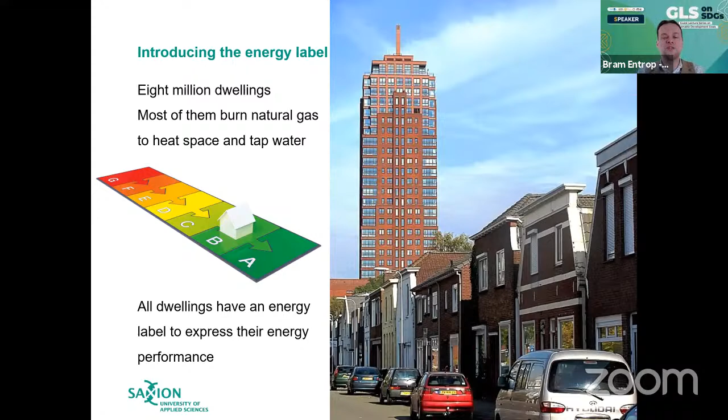So a great transition needs to take place. We introduced, therefore, and also as the European Union expects from us, an energy label system for our existing houses, while there was already a regulation system in place for new houses since 1995. But only in 2008 did we officially adopt the energy label system for existing houses. A is the best performance, and G, as you can see by its colors, is the worst performance to expect.

What kinds of techniques are now commonly adopted? Well, we can see a high adoption rate regarding photovoltaic panels, systems that produce electric energy for households and can be earned back within approximately 5 to 7 years. Most consumers think that's quite a nice time to earn your investment back.

So photovoltaic systems are quite quickly adopted, and it's quite hard now to obtain them because all these companies are quite busy with installing them.

In new houses, heat pumps are also quite commonly used now because you're not allowed anymore to use natural gas. So the first thing that comes to mind for people are heat pumps, making use of thermal energy coming from the earth, or thermal energy coming from outdoor air.

LED lighting techniques are also commonly adopted. It's a no-brainer anymore, so everybody will now install LED lighting. And more often you see heat pipes being installed, or more conventional thermal solar collectors. So those are the techniques increasingly being adopted in new buildings.

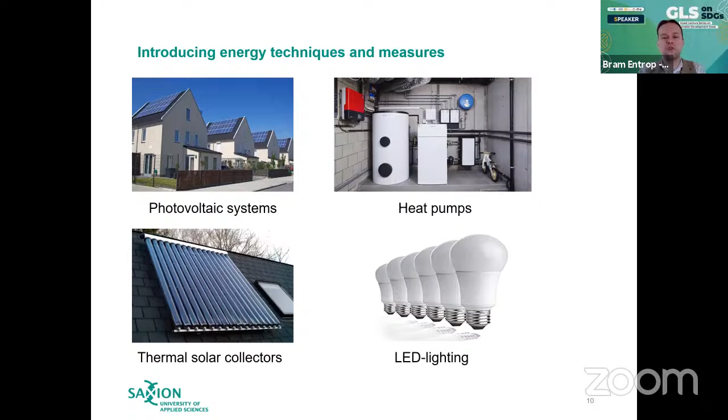For the existing building stock, we still have quite a challenge. So we wondered in our research setup how to develop a framework to assess the implementation potential of energy techniques and measures on the basis of their effects on and for stakeholders in residential building projects. We have more or less 3 areas we were looking at, namely the energy performance, the financial impact, and the decision-making process in building projects.

And somewhere in the middle, where everything aligns with each other, where everything is positive - a perfect situation - there these energy techniques will be properly implemented. So we were looking for that particular spot, where to find it.

Well, and then you first need to know something about how these energy labels are attached to those houses. For new buildings, we had an energy performance coefficient up to the 31st of December last year. In the past, already more than a decade ago, we had an energy index based on the energy performance advice. An inspector would come to your house, have a look, assess all kinds of lengths and the type of insulation, the types of systems you have installed, and decide for you what the energy index is for your building.

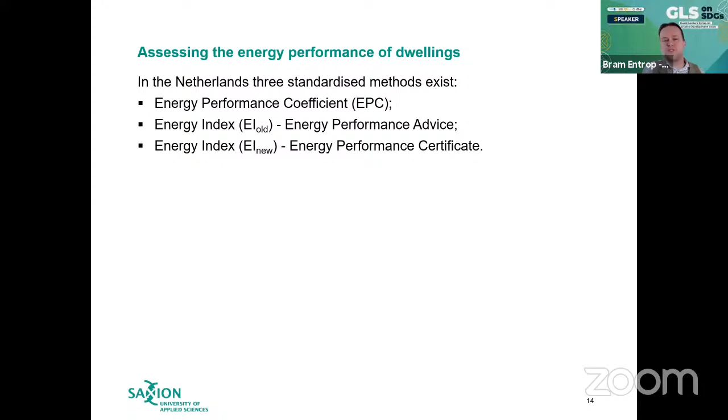And later on, almost based on the same principles but with a new calculation technique, we had the official, EU-obligated Energy Performance Certificate. So the Energy Performance Certificate more or less replaced the much older Energy Performance Advice, but not with all the improvements that were necessary, to be honest, but we will see what happens next.

So we also conducted a study on 8 houses from different years, and you see all kinds of strange elements in these calculation methodologies. One might expect that if you conduct a calculation resulting in an energy performance coefficient or an energy index, it would also more or less reflect the actual energy use of the building. However, that is not the case at all.

Everything strongly depends on how you use your building. Who are the residents? What is their age? What is their day-to-day rhythm? That will have a huge impact on what the actual energy use is.

These 3 methodologies all try to reflect an energy use that one might expect with standardized usage of the building, considering its building-related elements. So the energy use of your refrigerator or computer is, for example, not incorporated here. That you leave your television on all day is not regarded in these types of methodologies either. They also expect that you have a standardized temperature all year through in your living room and bedroom, etc.

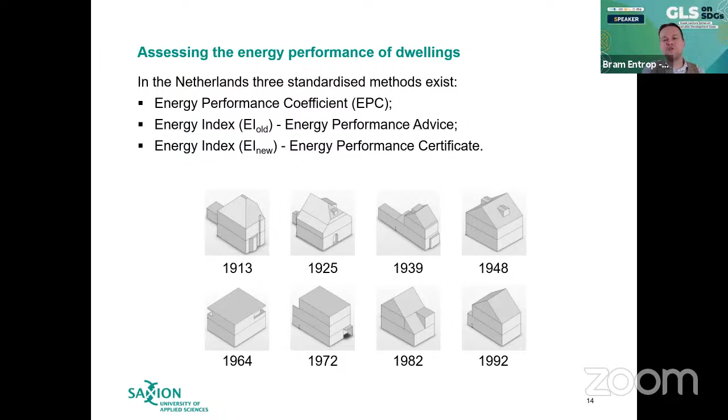So the relation we are still looking for is between actual energy use and the theoretical planned energy use based on the design of the building. We have 3 methods in place, however, all have the same basic equation.

On the upper side of the equation, one can find an assessed energy use based on the design of the building and its planned installed systems. And in the lower part of this equation, there is an allowable energy use.

So when your house has a certain floor surface and surface of the thermal shell, depending on the particular size of that, it's allowed that your energy use is slightly higher when your house is bigger and slightly lower when your house is smaller.

And you need to take all kinds of measures, for example improved insulation or a better heating system to be installed. You need to install some photovoltaic panels to make sure that this upper part of the equation is low enough. So in the end, this value - the energy index or the energy performance coefficient, since the setup of these equations are all the same - is as low as possible.

For your idea, we started in 1995 for the energy performance coefficient with a value of 1.4, and last year it needed to be 0.4. So gradually the regulations improved in that regard.

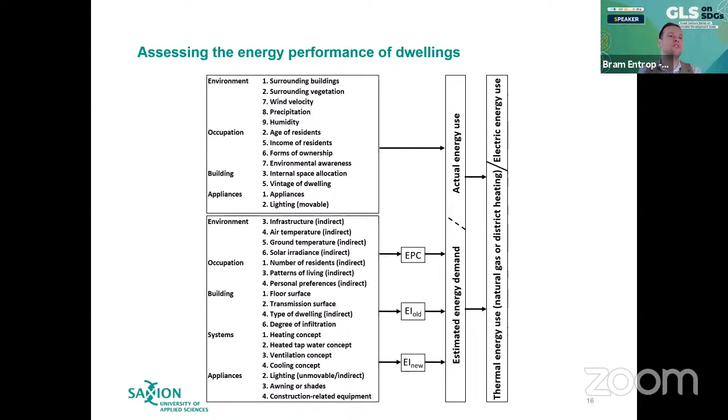However, by the 1st of January, we have a completely new methodology. We call it the nearly energy neutral buildings, in short, in Dutch, BENG. It's a BENG building, but it now has 3 indicators. So we scaled up from 1 indicator per building to 3 indicators. Namely, you need to make sure that the maximum energy demand is not that high. You have a maximum primary fossil energy use that is not allowed to be exceeded. And there is a minimum percentage of renewable energy use sources that needs to be adopted. So we have now regulations per square meter that you're allowed to comply with.

That maximum energy demand changes slightly when your house is more or less compact. So they also gave thoughts about, well, if you construct a bigger house, you probably can also take more investments to make sure your building is more energy neutral than when you construct a smaller house, often associated with social housing, for example. So they also tweaked these kinds of values in this new methodology.

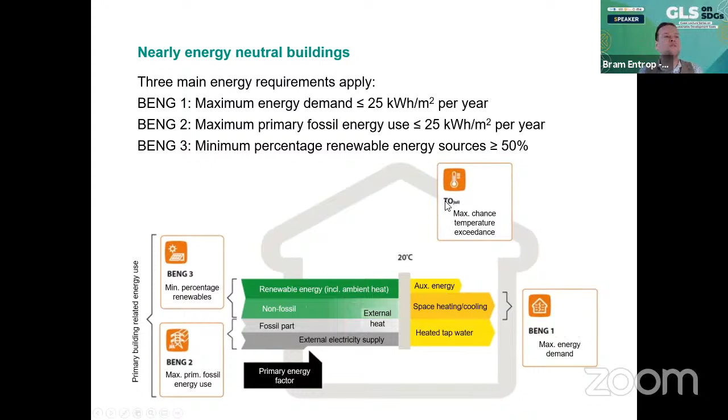So you need to apply shading. You need to apply, for example, that could be a technique to be adopted, a heat pump with a cooling facility taking place, etc. There are multiple ways to also comply with that regulation. So that's what we call the TOjuli.

Please warn me when I'm heading for my time schedule, of course, Sarah. Yes, you still have 15 minutes. That's around 10 minutes. Yeah.

Because we're heading to the financial elements in this regard. And when you do these kinds of investments, you always need to be aware that often you can buy certain techniques in a shop, but then they do not work properly yet. They are not installed in your house properly. You cannot use them directly. And many of these techniques already in the design stage of your building need to be taken into account. So it was also for us interesting to have a closer look at what's happening when we are aiming for these kinds of investments to improve the energy performance of your building.

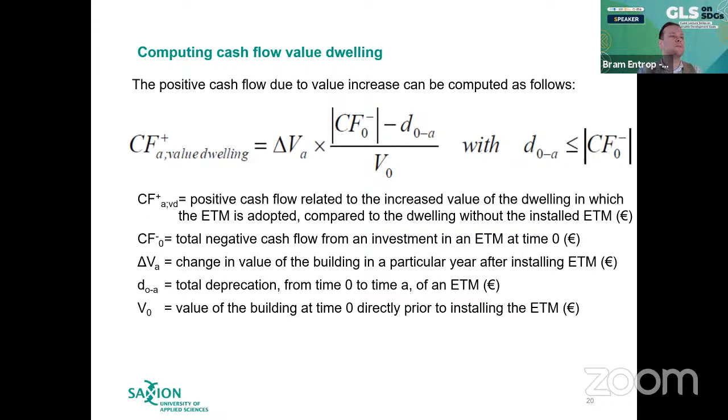What about these decision processes? We took a look at 4 residential building projects where decisions were taken regarding the energy performance of these buildings. Although there was a regulation to come to an energy performance coefficient of 1.0, in all situations they were aiming at a 10% improved energy performance, so 0.9 needed the score to be. And all kinds of discussions took place on how to come from that 1.0 to 0.9, and which extra investments needed to take place to make sure you can come to that 0.9.

In this research, it became quite clear that the regulations laid down in our national building code are not part of the debate anymore. As soon as the national government states you need to improve the energy performance, contractors and architects will look for the cheapest possible way to reach that new score in terms of investment costs, not return on profit over time for the future user, unfortunately. They won't debate that anymore. They'll improve insulation packages, start off with 2 or 3 photovoltaic panels on the roof, and then it's set until the next stage, the next regulatory improvement.

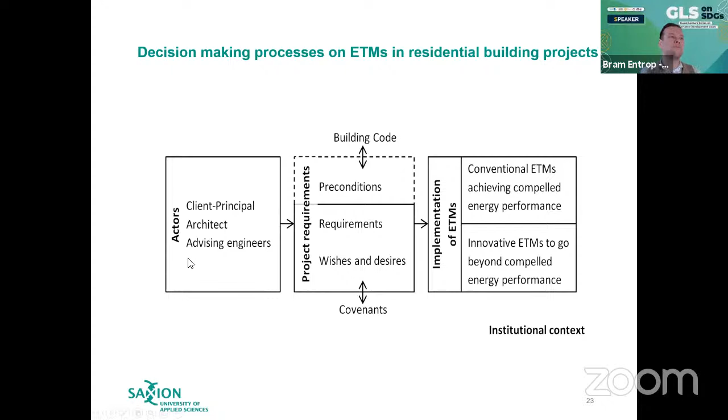What about these phase change materials then? Phase change materials have the ability to store thermal energy at a particular temperature - by that means it's a kind of battery, a battery for thermal energy. We apply these phase change materials in concrete floors. So during the day when people are at work, the solar irradiation entering a house will store some energy in the floor of the building. And when you come back later during the early evening, when environmental temperatures are dropping, these floors will start to give way the stored thermal energy.

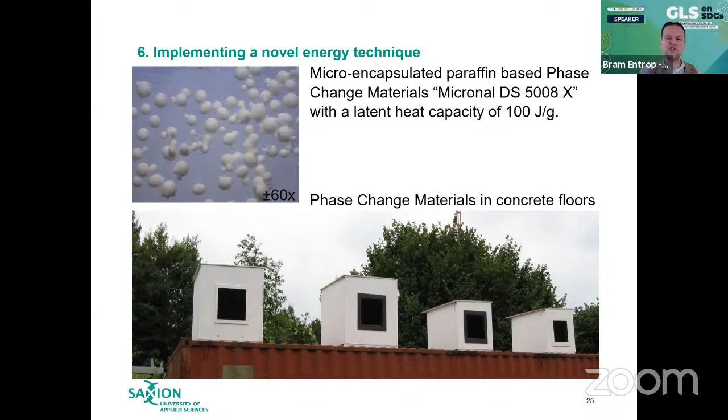So we conducted some experiments. We developed 4 boxes with and without these phase change materials and with different insulation packages, and we saw that these phase change materials - in this case paraffin-based - really had the ability to store solar thermal energy and give back their heat during the evening, during the summer day, and also partly from spring to autumn. During the winter, you need to be aware that you will not heat these phase change materials with fossil fuels. So the change temperature needed to be above 21 degrees, but not too much above this value, and therefore 23 degrees seemed like a proper temperature here in the Netherlands for our experiment.

What we saw is that if you have this technique available without any hard data or simulation software for an architect, then it's not likely that an architect, together with advisors in these kinds of design and construction processes, will adopt your technique. You need to have everything in place so that you can make clear in advance that this technique will do what it's supposed to do. Without that simulation software - and we also experienced this with another innovation, a double roof system that's been introduced for more than 10 years - you really need simulation software so that advisors can work with it.

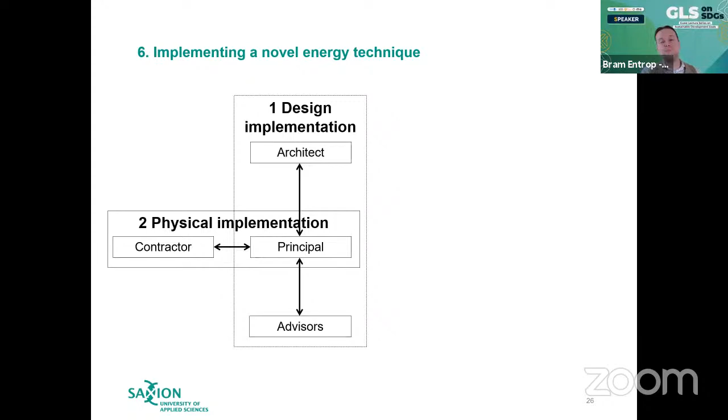And then you also need to persuade the contractor to apply these techniques. Furthermore, in some cases the owner of the building will not even be the user of the building. So you need to facilitate communication between all these different stakeholders and actors who have an important position in this whole design and construction process. We'd like to make you aware of that. A design implementation needs to take place, a physical implementation needs to be guided.

Marketing implementation needs to be taken, and user implementation when you are planning to introduce a new energy technique or measure. For all the entrepreneurs among you, and for all the researchers with their new techniques, please be aware that these kinds of marketing techniques really need to fall in place when you're planning to introduce a new technique to the market. At least that would be our suggestion.

So to sum up: the implementation potential of ETMs can be improved by these theoretical EPIs. However, be aware that in some cases there's a mislink with the actual energy use. So when you have a new energy technique, make sure the building code and the energy performance indicators that apply in that particular country are in line with the technique you want to introduce, and that you can also persuade the actual residential users through a reduced energy bill.

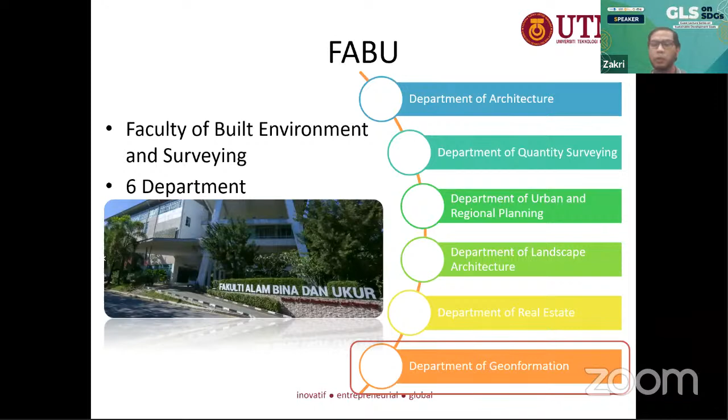Me and my team are in the Faculty of Built Environment and Surveying. Under this faculty we have 6 departments: Department of Architecture, Department of Quantity Surveying, Department of Urban and Regional Planning, Department of Landscape Architecture, Department of Real Estate, and Department of Geoinformation. I'm under the Department of Geoinformation, and this study is basically a combination or integration of my department and the Department of Real Estate.

This is our current bachelor degree programs. For undergraduate we have Bachelor of Geoinformatics, Bachelor of Science Geoinformatics, and Bachelor of Engineering Geoinformatics. For master's we have Master of Science, both coursework and research, and also Master of Philosophy. Under that, we have Master of Geoinformatics, Geomatics, and Remote Sensing. And for PhD, we have PhD in Geoinformatics, Geomatics, and Remote Sensing. So that's just a little background on UTM, FABU, and my department, Geoinformation.

Now we're going back to our main topic, what I'm going to share today. As I said previously, I'm going to share how we assess the surrounding area of affordable housing in terms of the social aspect only. We have another study on the environmental aspect and other aspects, but it's still not finished yet, so I cannot share that now - maybe a little bit later on.

Okay, my sharing today will cover a little bit on introduction, and then the problem that we faced previously. From there we come up with the aim and objective, and then the method that has been used inside the study, and then a little bit on the result, and lastly the conclusion.

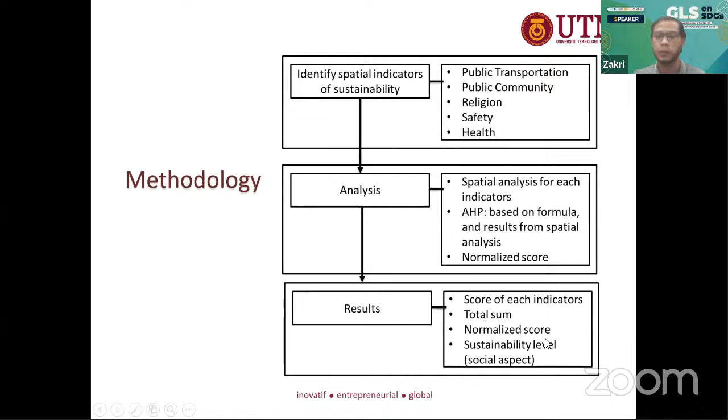So these are the 5 main indicators and also the sub-indicators. The first indicator is public transportation, meaning we want to see how far the affordable housing is from public transport. In Malaysia, we have train stations and buses. Besides that, we also have taxis and Grab, but we have so many online taxi applications right now that those are not included in our study because we want to focus on public transportation first. We have LRT and MRT in Kuala Lumpur, and we want to see the distance from the affordable housing to the LRT or MRT station. The second is the distance from the affordable housing to the bus terminal or bus station. The second main indicator is religion, because Malaysia is well known as an Islamic country, so we only focus on 2 - that's the data we have for this study.

We have masjid and also surau, maybe musola in Indonesia, known as musola or so on. Okay, and then the third one is the public community area, including the Balai Raya, Dewan Orang Ramai, and Dewan Serbaguna. This is the area that most people use for events and so on.

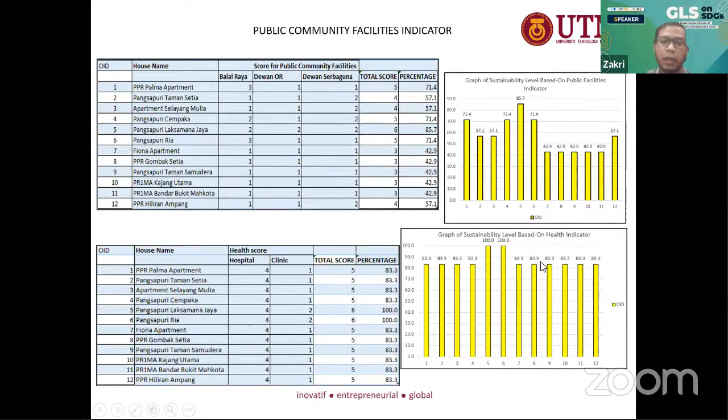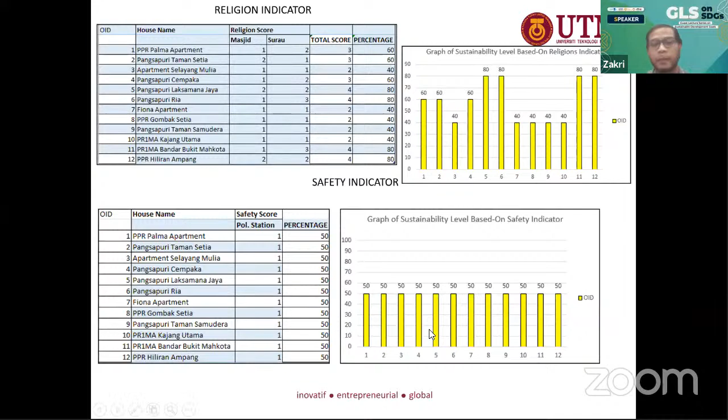Okay, and then for safety indicator, police station - quite far. All of the affordable housing are quite far from the police station, it takes a lot of time. So maybe if some crime happens, police will take a longer time to arrive at this affordable housing. So in terms of safety, the score is quite low.

Okay, from there for public transportation, I forgot to put here, but we have it over here. From here we can see the total score for public community, health, religion, safety, and public transportation - we can give a score for each sub-indicator. Then from there we can sum up all the scores, and then normalize the score because some scores are out of 5, and others are out of 2. So the scoring is not the same, so we need to normalize the score.

Okay, so from there we can make a graph for all the sustainable affordable housing. So in terms of sustainability, most of the affordable housing in our study area does not even achieve 50% of sustainability level in terms of social aspect. So this means we need to do something for this affordable housing - maybe improve sub-indicators like public transportation, religion, public community, safety, and health near this affordable housing area.

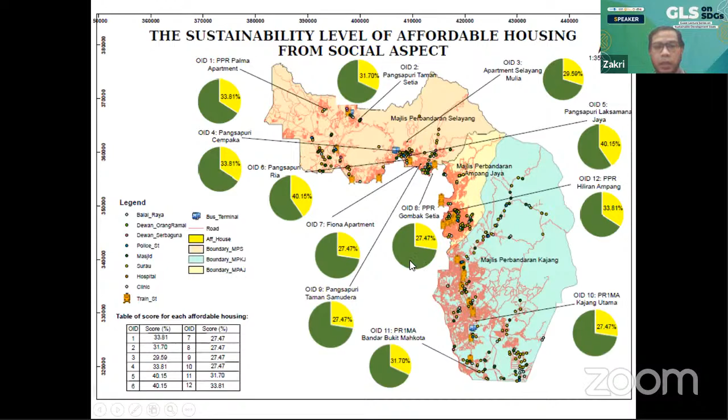So from there we can see that we can identify the sustainability level in terms of social aspect using spatial analysis and scoring methodology. We can also say that most of the current affordable housing in this study area, in terms of social aspect, is less sustainable. So that's the second conclusion.

To improve this, we can include more sub-indicators and indicators. For example, as I said previously, the distance to city center, and the Grab application or online public transportation could be part of the indicator. Besides that, we can also include other religions as part of the religion indicator, and maybe others. We can also include environmental aspect or economic aspect, or other aspects from the SDG, Sustainable Development Goals.

So that's basically what this study is all about that I want to share today. If you want to contact me, feel free to use my email, or you can go to my website. My email is zakri.tarmidi@utm.my or zakri.tarmidi@gmail.com. My website is people.utm.my/zakri.tarmidi. I think that's all. Thank you very much, back to you.

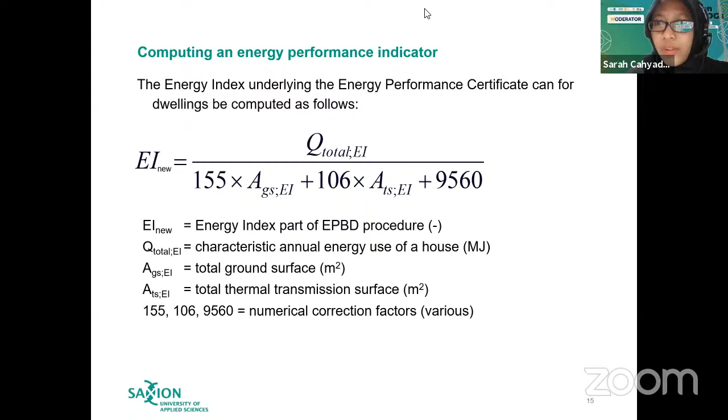Okay, thank you. I think there's one question from Hilna. Do you want to ask in person, Hilna? Or if you want, you can turn on your mic and ask in person. I think this is for Dr. Zakri. Okay, if not, I think I will.

I'll read her question. Thank you, Professor Bram and Dr. Zakri, for the excellent presentation. I want to ask Dr. Zakri, can we use this method to calculate the affordability of houses in rural areas? Because as we know, villages generally have few public facilities, so they must have a little score. Or maybe there are other methods to calculate the affordability of houses in those areas. Thank you very much, Dr. Sarah.

And thank you for the person asking, I don't know the name. Yeah, okay, okay, this is a very good question.

Very interesting. What I already discussed is about sustainability assessment. So for us to see the affordability, we need another data. We can use the same method for scoring, and also multi-criteria analysis to further investigate. But in terms of the indicator it will be different: the demographic, the housing price, and also the area of that housing and so on. So we can put it as indicators, and then from there we can refine the scoring for each indicator or sub-indicator, and then we can see the affordability - is it affordable, not affordable, less affordable, and so on. Hopefully that answers the question.